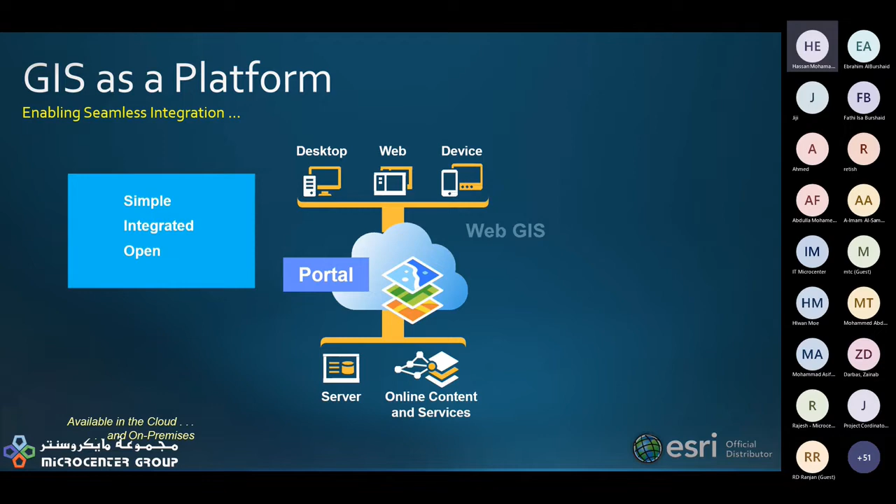This integration with the web has made people who were working in silos before, individually doing their own work, share their work with each other, and allowed organizations to work as an integrated unit rather than as individual silos.

Now, GIS also encompasses all kinds of data. In addition to the enterprise data, maps, and imagery, we now have content coming from a lot of sensors through various devices, and that enables us to have IoT analytics on our GIS. We can use big data, and we can even integrate social media content and do analytics on that, and many things that will become clearer when our speakers talk later on.

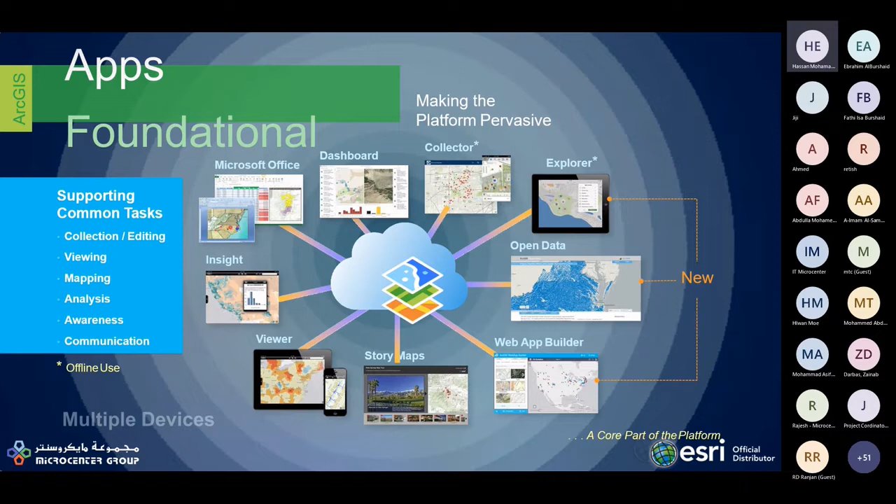ArcGIS also has many applications, and this is increasing every month as we go on. Things like Dashboard, Collector for field data collection, Explorer, Story Maps, Builders, Viewers, and so on are all becoming an integrated part of the apps that you can use, and you can have controlled access to these apps based on need, accessing the whole environment which is available.

Now, back to GIS Day. The previous year's focus was GIS in the time of COVID. What we did here in Bahrain was set up a portal with the Ministry of Foreign Affairs, and it was also linked to the global portal, which was hosted by Esri.

This year, our focus will be basically on three things: real-time visualization and analytics; BIM, which is building information modeling, integrated with our GIS, which is geographic information systems; and the third focus will be on spatial data science.

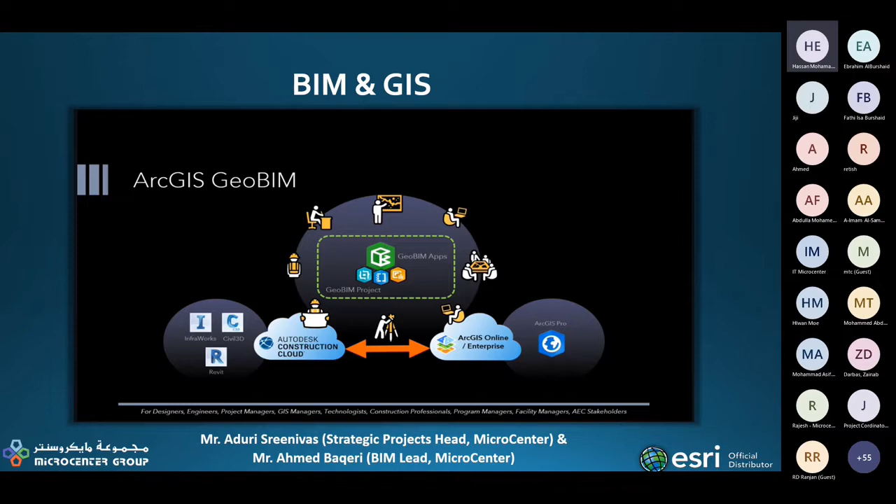Our third topic will be spatial data science, hosted by our engineer Ebrahim Alburshaid from the NSSA, the National Space Science Agency, who has been diligently working with Esri technology to develop analytics like feature identification from satellite imageries, aerial photos, things like vegetation, palm trees, and so on. He will enrich us with his knowledge in this field.

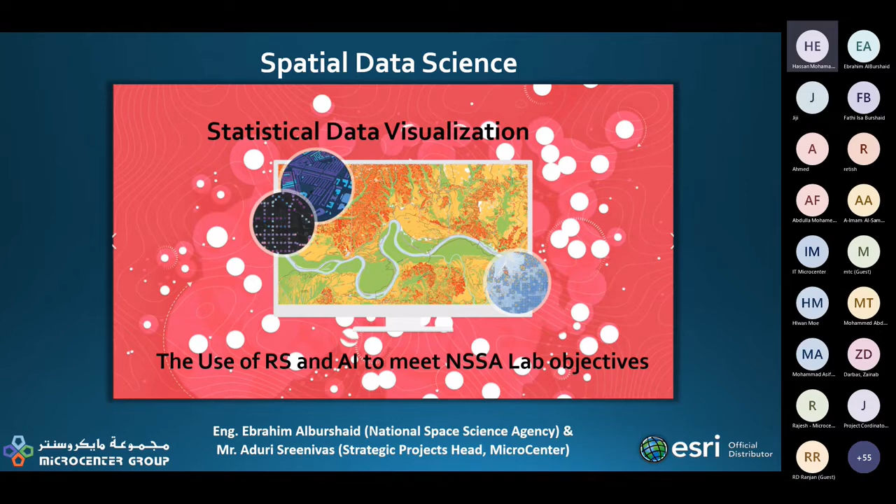Before I close, I would like to mention something about the organization, Micro Center, which we established in 1983-84. We have several divisions now. The Micro Center core division is Business Solutions and GIS Solutions. We have Micro Promo, then Micro Center Engineering and Special Projects Division, Micro Training Center, and QST.

On the very right side is our branch in Saudi Arabia, doing all of these things in the Kingdom of Saudi Arabia. Now, Micro Center group, I'll focus only on Micro Center Engineering and Special Projects Division here. We started this in 2010 or 2011, and we have moved into high-end precision surveys as inputs to our GIS system.

We use our precision RTK GPS, GPRs, ground penetrating radar for detection of utilities underground, and cable tracers. We also have LiDAR scanners, terrestrial laser scanners. We've now moved into vehicle-mounted LiDAR systems and very high resolution LiDAR technology.

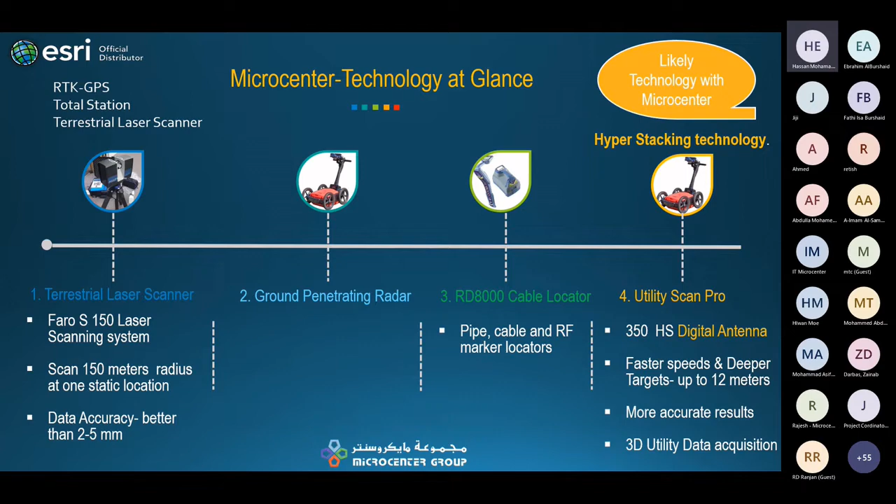With that, what we do is an integrated approach: LiDAR data acquisition followed by or with underground utility and soil profile acquisition. We can now move into mapping and 3D modeling and building information modeling, BIMs. All of this is now integrated with Esri ArcGIS Pro, as you will see with our next speakers.

The second thing to mention is about Micro Training Center, which is our training arm. It started out as an authorized Esri learning center, but now with the collaboration and integration between Esri technology and the AutoCAD world, spearheaded by Autodesk, we have also become an Autodesk authorized training center.

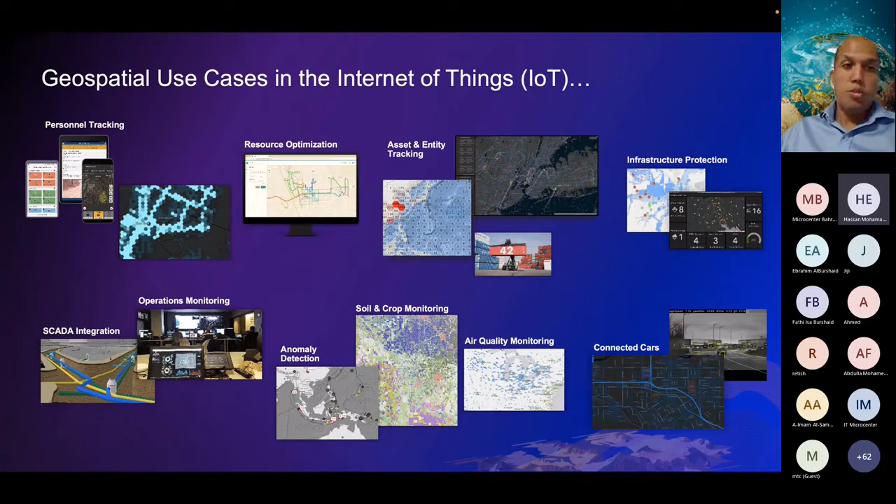So the key challenges in all those IoT sensors and in meeting those needs to make those use cases viable is mainly the ability to process high volume and velocity data to enable mission critical applications. In order to do this, we would like to first ingest all this data and analyze it.

Based on the analysis, find out what are the things that we would like to be alerted on, what are the things that we would like to take actions on. From there, this is where real-time visualization and analytics inside Esri came to the surface.

To integrate all the sensors, networks, and the Internet of Things platform that you have in place, whether it's fixed sensors or moving sensors, whether you have direct access to it, or whether it's a cloud IoT provider, you will be able to integrate and ingest feeds from all those sources or all those sensors, whether you would like to manage this infrastructure on premise, inside your organization,

or if you need our help in managing this infrastructure, making it scalable to support high velocity, huge data, we'll love to have this using ArcGIS Velocity. On premise, we provide you with ArcGIS GeoEvent Server and GeoAnalytics Server to have it in-house as you want.

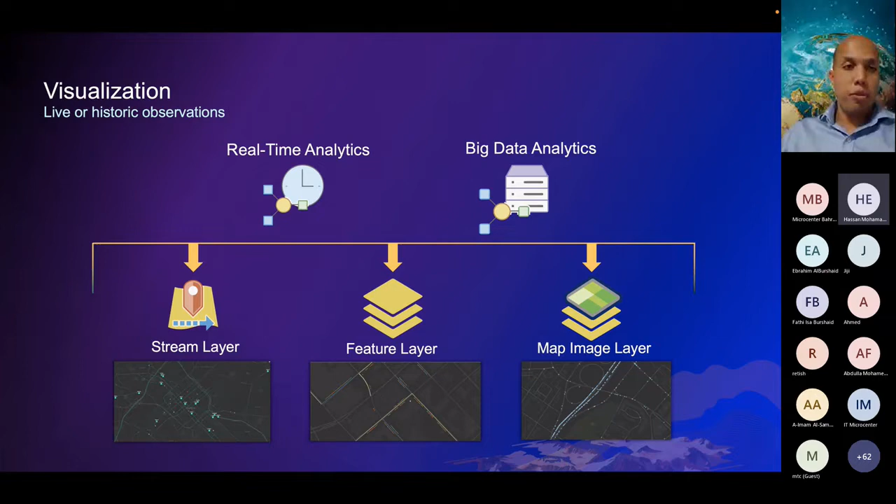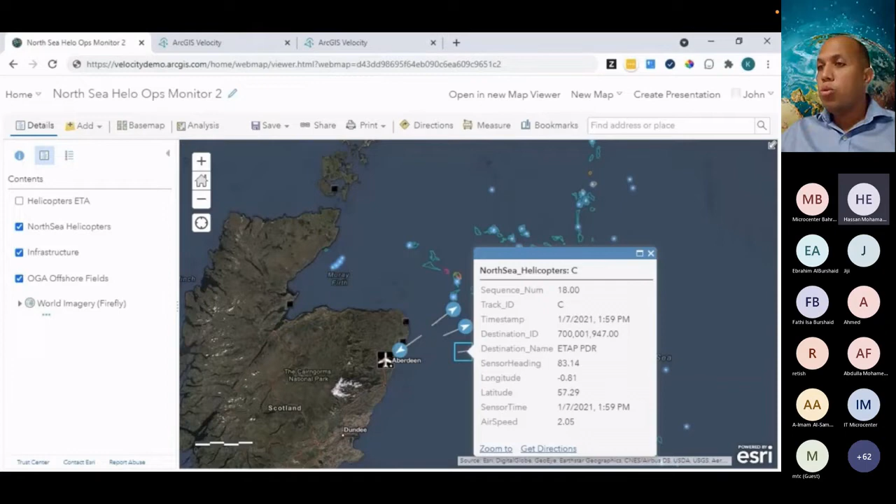Here we'll be able to get information about each helicopter, the timestamp, and various readings about the destination and where it's coming from. So the idea is, how can we configure such a thing, or benefit from such information? ArcGIS Velocity, with its three fundamental components—feeds, real-time analytics, and big data analytics—lets you go to the feeds and pick how you'd like to ingest the data.

Whether it's on ArcGIS or on the cloud, like the case we have, or web and messaging, or various data providers like Verizon or Geotab—there are a lot of options here based on the feeds and the IoT platform you're integrated with. So in this case, we'll take web and messaging.

As you can see, there are various ways for integration. We decided for this one to take an HTTP connection, and there's mainly no authentication type, so also keep an eye on whether it's a secured infrastructure.

For the schema, we also have auto discovery capability that allows ArcGIS Velocity to pull a sample of the data to understand exactly the schema. By discovering the schema, it provides us with what data is coming, what fields are coming, the field types, names, and various samples of the range and values. We can change the field types as we want, or ignore any fields we're not interested in.

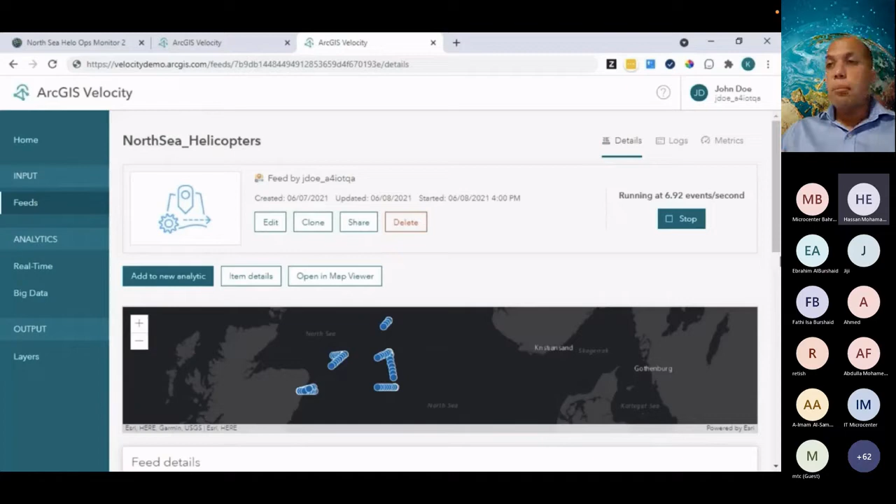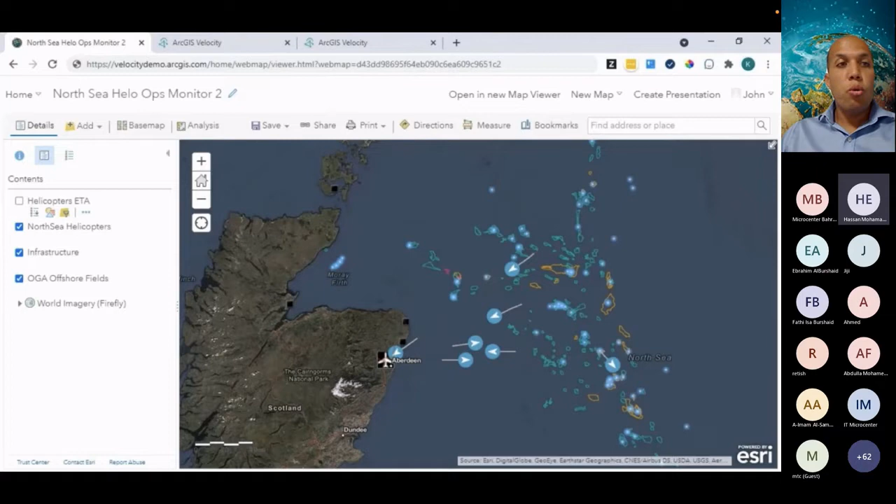The feed name—just define the name, and now we have this feed. We can see all the details here, showing the various configurations for this feed. By just having this, now we have a live stream, as we can see on this map, showing information of all the helicopters as they're moving, in a simple web map that we can use across the ArcGIS platform, whether it's in mobile devices, other web pages, or desktop applications with the various capabilities of the API.

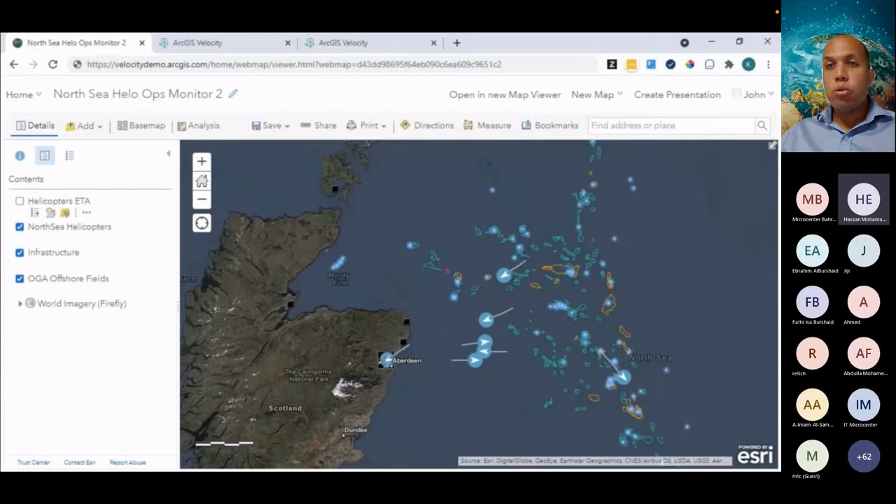Moving forward to the next element, which is real-time analytics, mainly for processing and analyzing the real-time data streams, which is the feeds.

So the flow here is we provide you with a way for configuring the pipeline of the analytics that you would like to apply to all the feeds as it comes. And the outcome would be either a feature layer for visualization or further monitoring, or it would be a notification, or an activation of other systems to take action as needed.

So the real-time analytics process and analyze those real-time data streams by having a definition of the input sources, which would be the feeds we mentioned, or it would be static data sources that we can add. Like, for example, in the previous example, the airport, because it's a static data source. We can define those as an input for those real-time analytics.

Those feeds, the sources of them would be coming also from various sources, as we mentioned. It would be from Amazon, from Azure, or even a public website with polling technology.

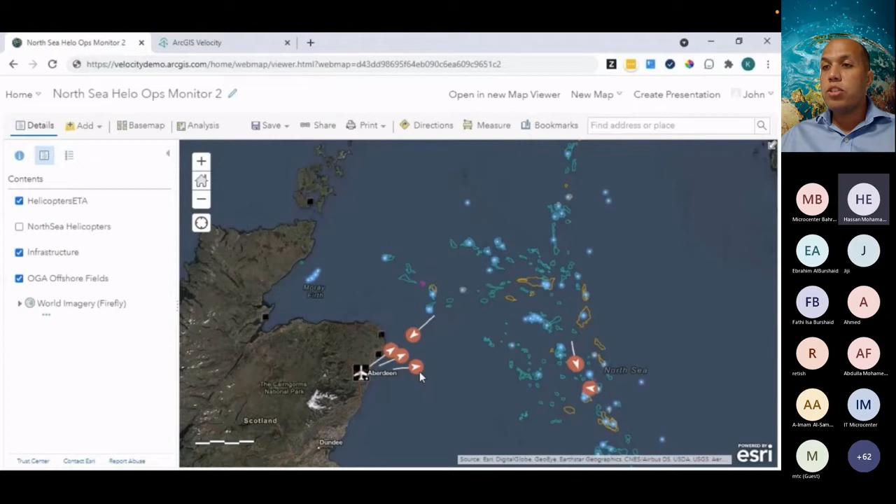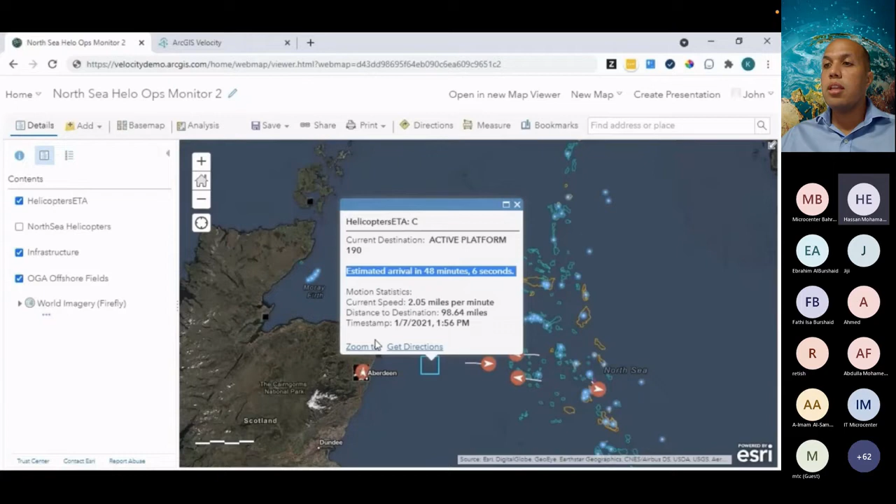The red ones here are the ones that we have just enriched with the estimated time of arrival. By just clicking on any one of them, now we have more insightful information. We know the destination, we know the estimated arrival time is in 48 minutes, and we also have motion statistics about the current speed, the distance to destination, and the timestamp.

This is how you would be able to leverage ArcGIS Velocity by defining this pipeline of analysis tools based on the real-time feeds. This is not limited only to simple analytics. We can also apply geofences to understand the distances. Let's see another example for applying dynamic geofences here.

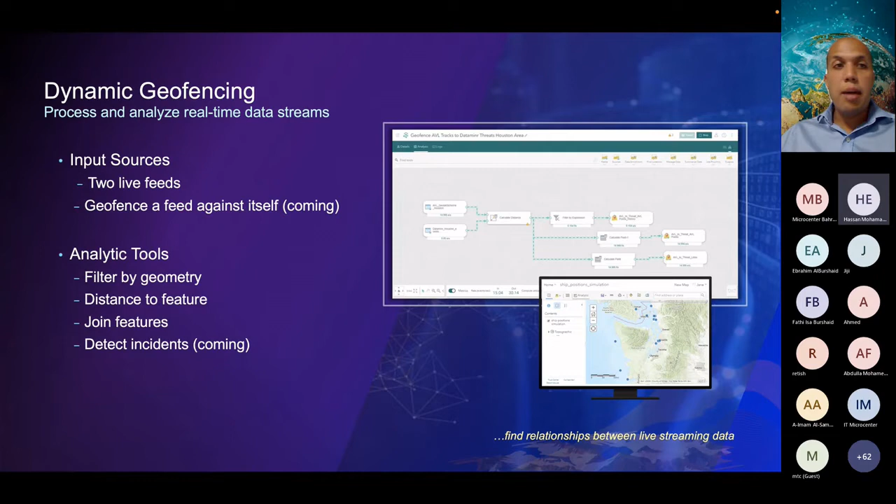Rather than talking about the flights or helicopters, let's go to the land here. In the land here, we have this AVL tracking system with all the AVL tracks as we are seeing, which we just defined its feeds to have all the information about the vehicle. Zooming in, we will be able to see them moving live, and this is in the area of Houston. So we would like to understand, are there any hazards on them or any threats on them?

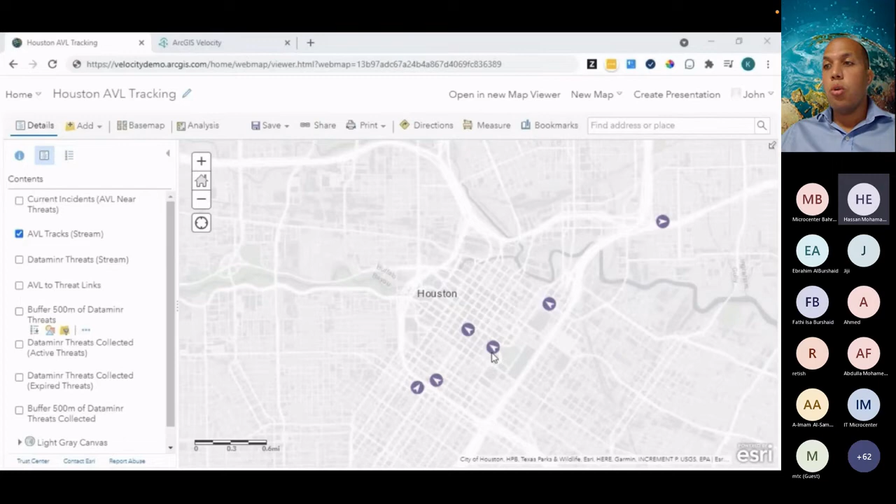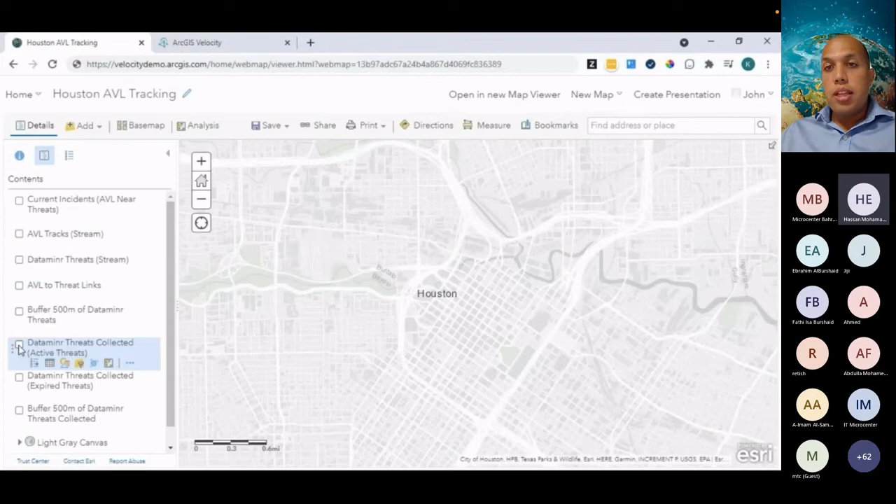We can leverage this by also integrating another feed coming from another partner of Esri called Dataminr, which provides threats actually across the world, whether it's political threats or major threats or disasters happening around the world. Let's see here that those dots in yellow are the Dataminr feeds, which is a representation of those threats. We would like to understand if any of our fleet is getting in proximity to those threats.

In order to accomplish this, we would like to build a buffer around each one of them, and then later we'll be able to have defined an expiry of the threats. The ones here, as we are seeing in gray, are outdated threats. So we need to ignore them and just understand if there are any risks or hazards on our fleet, because those are outdated already.

So we'll be able to filter this and define all this to identify which vehicles we need to keep an eye on, and maybe provide some messages and emails to those drivers to understand the critical situations they are in. We start doing this by going to ArcGIS Velocity and defining all those steps one by one. Let's go there and see it in place.

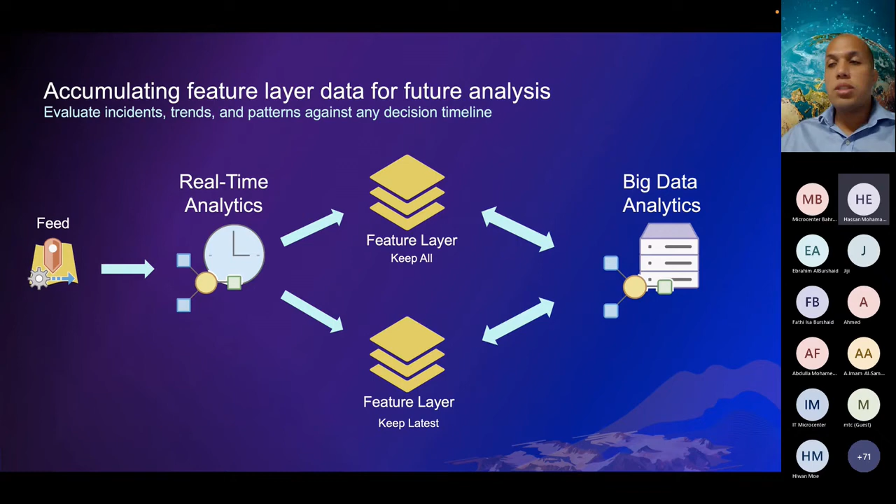So this is an example of how to apply real-time analytics using ArcGIS Velocity. But the next part is not only about real-time analytics, but also about the ability to create the same analytic pipelines on historical data. This historical data will be massive, billions of records. ArcGIS Velocity allows, in addition to real-time analytics, storing all historical records in feature layers, and using big data analytics with the same approach to create pipelines like the ones we're seeing here.

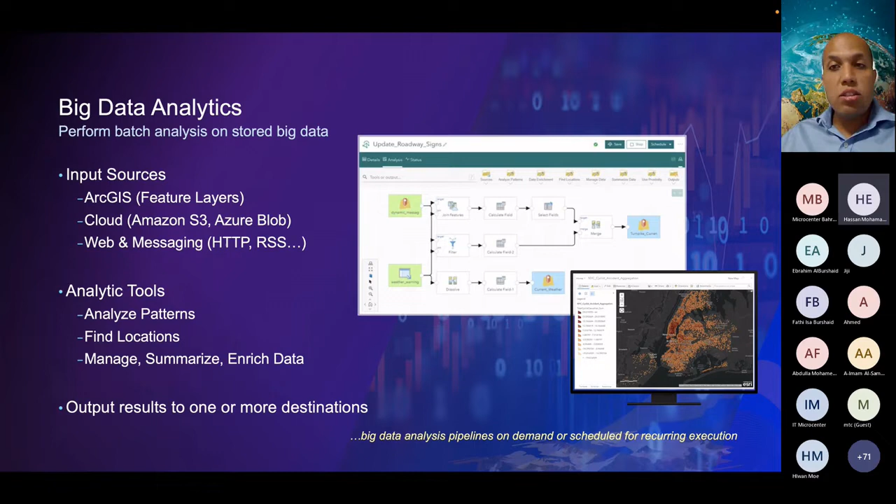You'll also be able to define the inputs, which in this case will be either feature layers or S3 buckets on Amazon or Azure blobs. This is for historical data places with massive big data, and you'll be able to ingest it not as real time, but for analytics purposes, to apply analysis patterns, find locations, and summarize the data.

You can run big data analytics only once, which would be great, but in some cases you may also need to run them periodically, maybe every few minutes to summarize the data because there is massive data coming, or every hour, or overnight, or maybe it's recurring every day. So you'll also be able to define the frequency of updates.

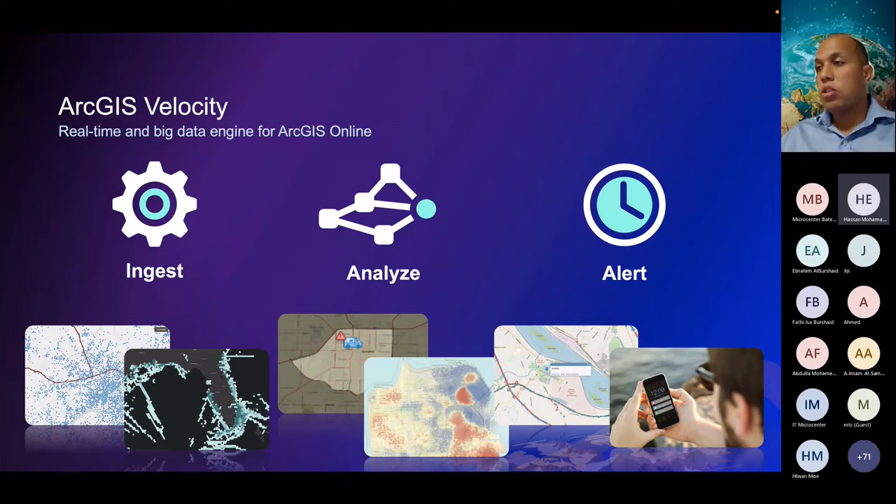To wrap up, this is how ArcGIS Velocity works as a real-time and big data engine on ArcGIS Online, ingesting real-time feeds, analyzing them in real time or in historical records, and providing alerts and messaging. This enables various capabilities including ingestion, visualization, applying geofences, detecting incidents, understanding trends of big data, and providing alerts as messages, emails, and various other ways for actuation of other systems in place.

ArcGIS Velocity is a SaaS offering. It's cloud-based, already configurable for user experience and guided, so no development is required. And it's managed by Esri, so it's scalable and will eliminate the IT staff configuration and maintenance needed for the infrastructure.

But at the same time, we also have real-time visualization and analytics available on-premise through the ArcGIS GeoEvent Server and the GeoAnalytics Server on ArcGIS Enterprise. This is for on-premise users and savvy IT staff who would like to manage everything themselves, or if you have a closed environment you'd like to extend with these capabilities, or if you'd like to do extra development into the intercommunication of those real-time feeds.

With that said, thank you for listening and being here with me, and I hope you have an enjoyable event. Thank you.

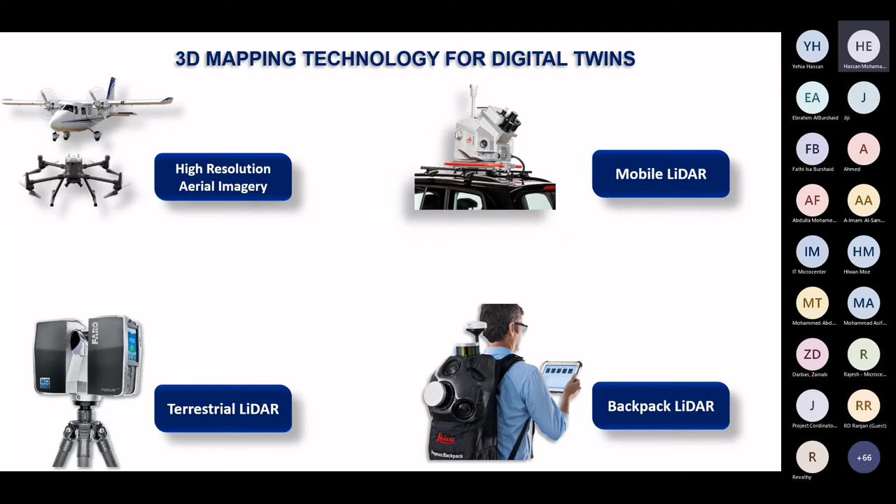And for indoor and outdoor, we can collect 3D point cloud data through terrestrial LiDAR, such as laser scanning. The evolution of mapping starts with 2D maps, going to panoramic image collection, and further developing reality models. Finally, we can build digital twins, meaning the virtual representation of a building.

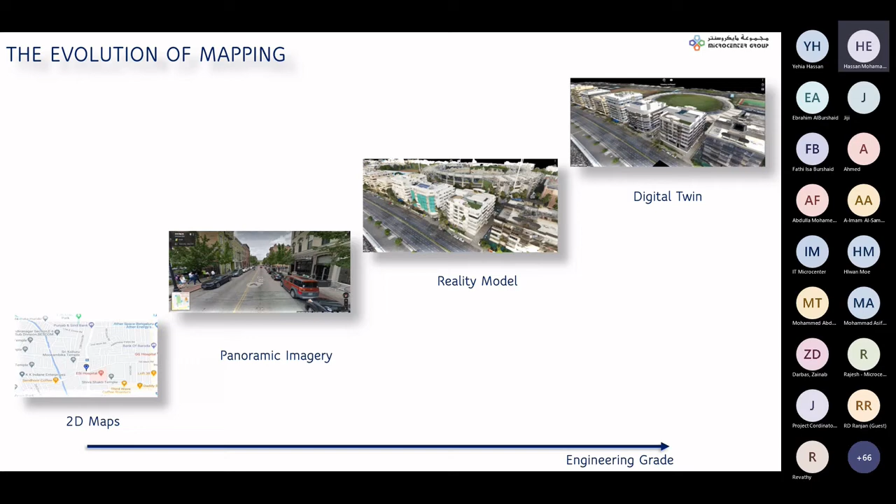Now, after collecting the point cloud data from either mobile mapping or terrestrial LiDAR and processing it, we can generate a BIM model with the help of point cloud. Now, what is a point cloud? Point cloud is basically a 3D representation of a physical object, whatever the 3D scanner captured.

The below shows a point cloud of a scanned indoor building, and we can see on the left picture a Revit model generated from the point cloud, where all features are designed as the actual model.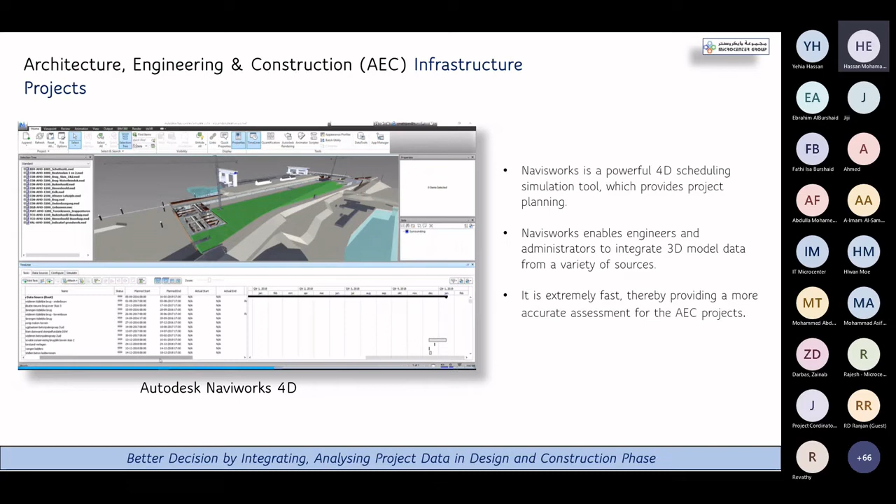When it comes to integrating BIM and GIS, designers, engineers, and project managers can utilize Revit, Navisworks 4D, and Civil 3D software. Using these technologies, we can go through Autodesk Cloud Platform and BIM 360. We can take all the inputs and transform from Autodesk Cloud Platform to ArcGIS Online Cloud Platform as an integrated component of a BIM and GIS solution.

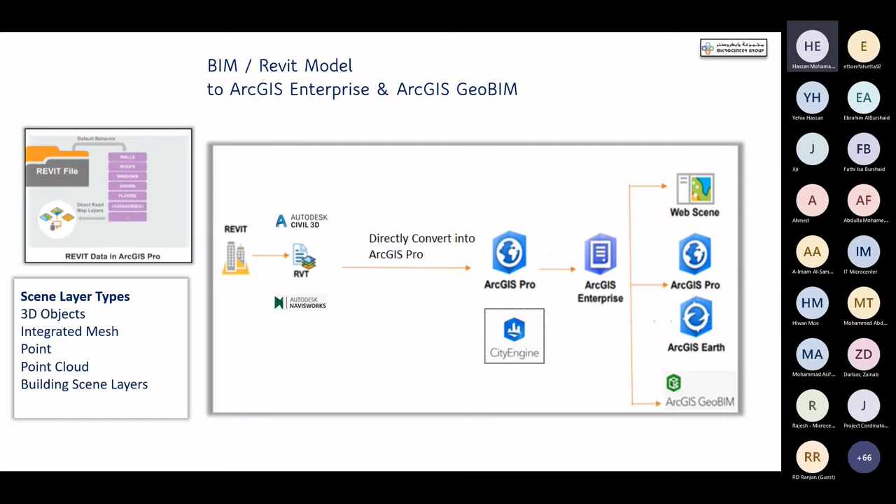So finally it will become a scene layer as a web scene. You can push it on top of ArcGIS Online as well as even ArcGIS GeoBIM - that we'll discuss in my next slides.

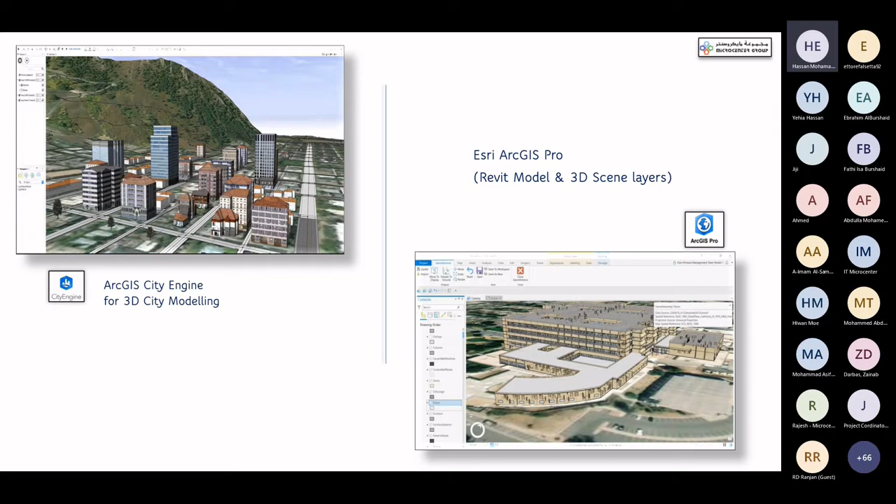So as I explained in my previous slides, CityEngine is 3D city modeling and ArcGIS Pro is a Revit model with 3D scene layers. There are screens that have been shown here.

Now coming to the next slide, we developed for one of my clients both 2D and 3D, okay? I'm not talking much about this project we developed for Bapco here, the local customer. But this is interesting since we're talking about BIM and GIS.

So I'd like to bring to your information, apart from the 2D advanced technologies, we also built 3D visualization analysis for subsurface facilities, cut fill analysis, elevation profiling, slope analysis, and exclusively even viewing well trajectories on a 3D map, because this is very important for the oil and gas sector.

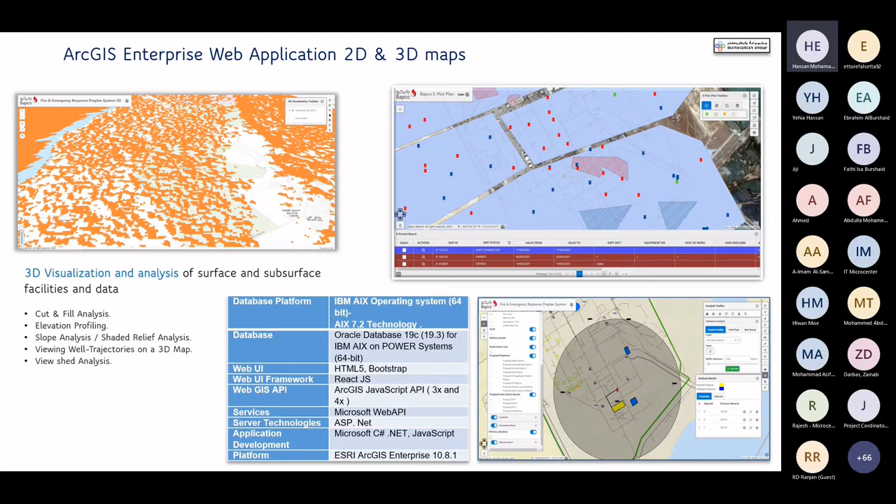So viewshed analysis also. Now if you look at the database platform, it's developed on top of ArcGIS JavaScript API 3x as well as 4x, because JavaScript 4x supports more 3D development, 3D visualization, and can enhance the functionalities.

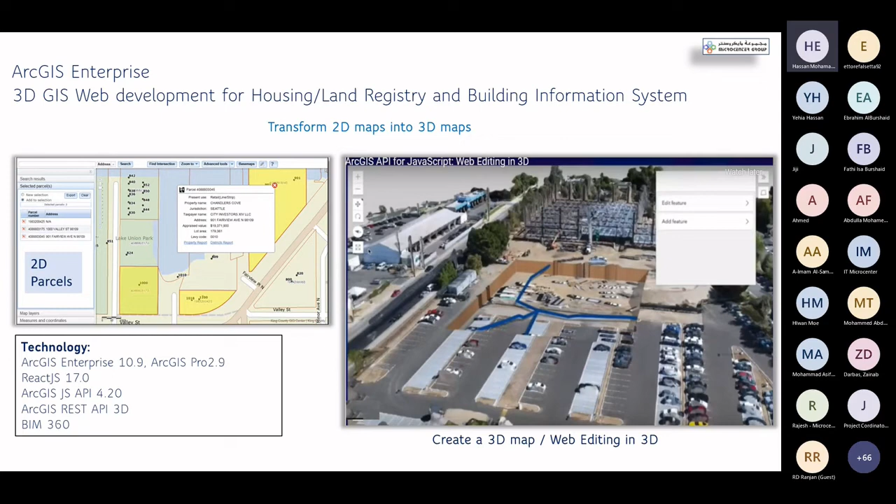The technology I've mentioned here, like ArcGIS Enterprise 10.9, was released just a couple of days before. We can develop with React.js and even ArcGIS API platforms. But the BIM 360 Revit model is very important, a primary requirement from the beginning to transform from 2D to 3D. So that's what we tried to show on the previous screens, transferring your 2D maps to 3D maps.

Now this is another 3D ESRI GIS web development for viewing, analyzing and BIM models. We can also make some sort of query and analyze that. Even 3D model analysis we can develop. So here I would like to show you a video for a few minutes.

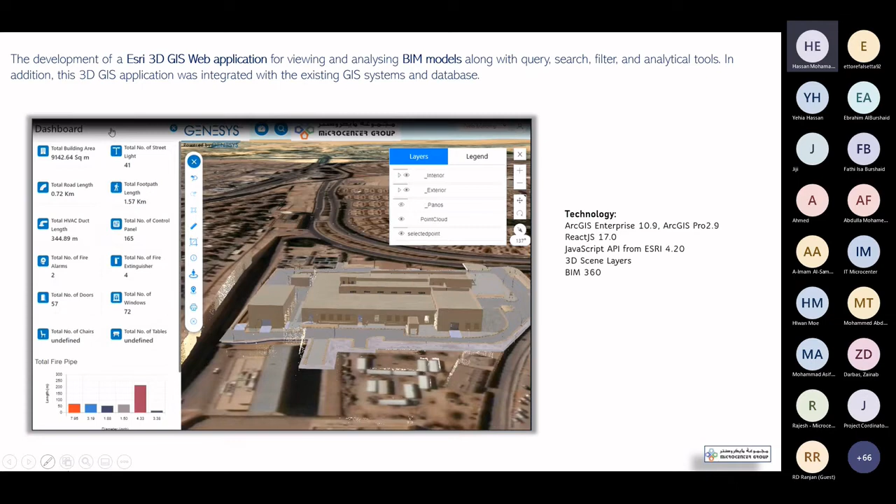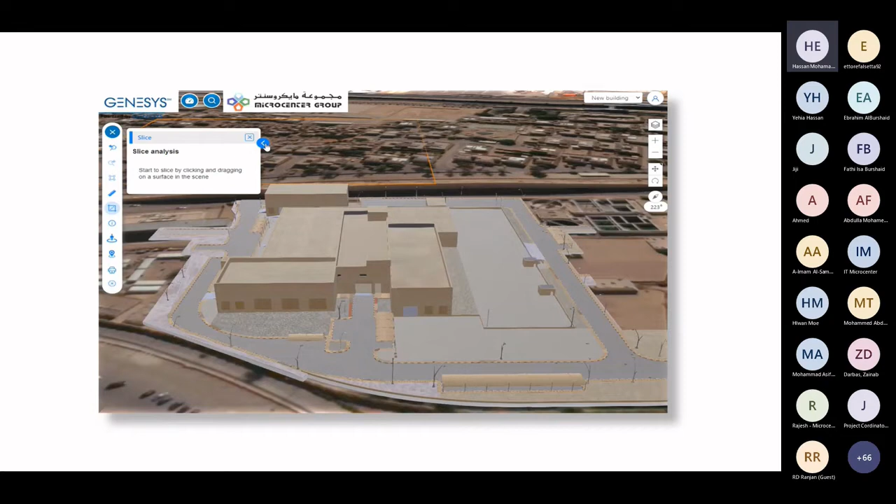This is one of the universities in Saudi Arabia we developed. If you look at this screen, it's been built on top of ArcGIS server. We did a 3D survey and created BIM Revit models, and you can see it going through slicing now. Slicing means you can see inside the objects and even external and outside as well. So this is the kind of slice analysis.

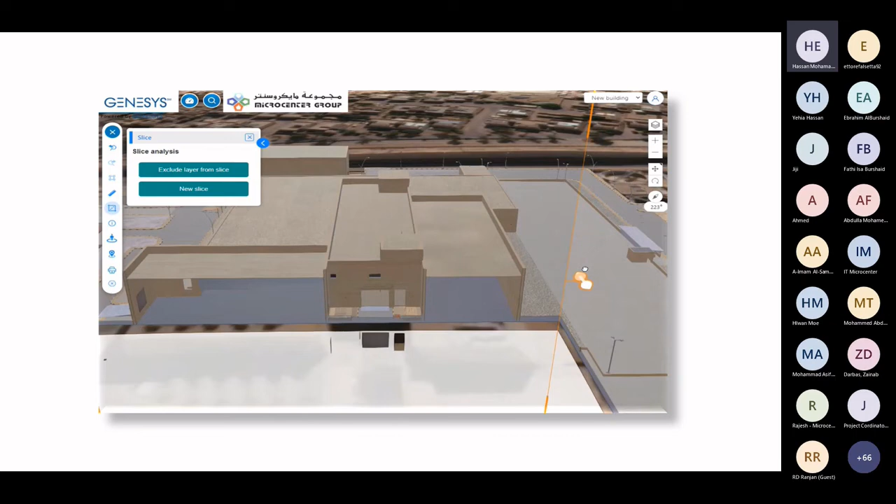With slice analysis, at a time you can view inside the door and even outside the door as well. You can visualize that because it's a BIM component, right? As a Revit model, we can view the inside of the building or outside at a time, parallelly.

Now here, this is a 3D scene layer as I explained in my previous slides. You can also measure the distance, calculate the area, and even the geometry, the area and dimensions.

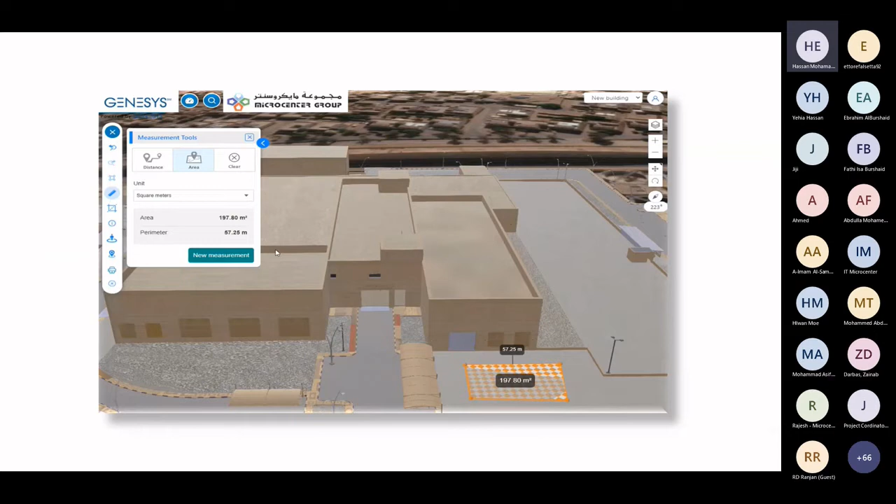The second thing is you can also have buffer kind of tools, and also have a print option. And if you can see the layers here, this is an interior, and even exterior, panos and point cloud data.

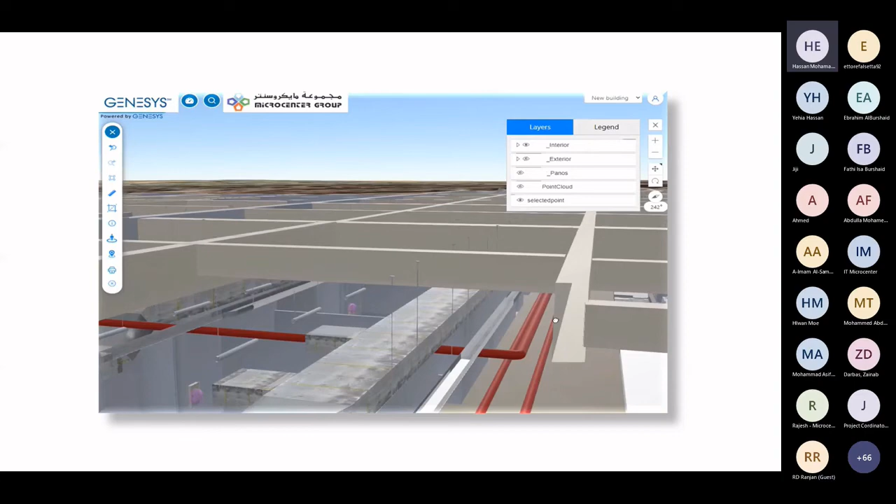Now here we are trying to show this is HVAC, meaning heating, ventilation, and air conditioning. This is an indoor mapping. So you can view indoor as well as outdoor, for example measure the distance.

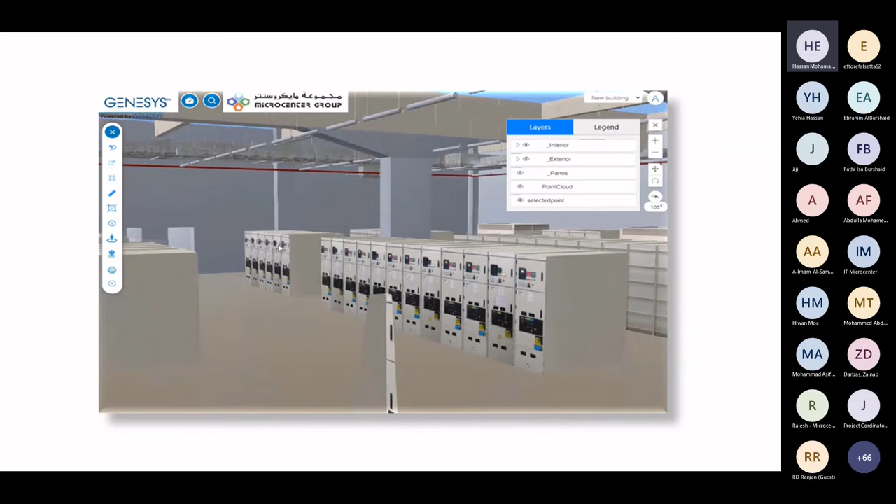This is HVAC - heating, ventilation and air conditioning - as a technology for indoor and vehicular environmental comfort. This is also something we can develop as part of BIM models. So point cloud data is being added on top of it.

We are working with our technological partner Genesys here.

So that's the dashboard analysis. As I said, it's built on top of ArcGIS server using 3D scene layers, also having web editing. You can create a complete dashboard analysis based on the client business requirements.

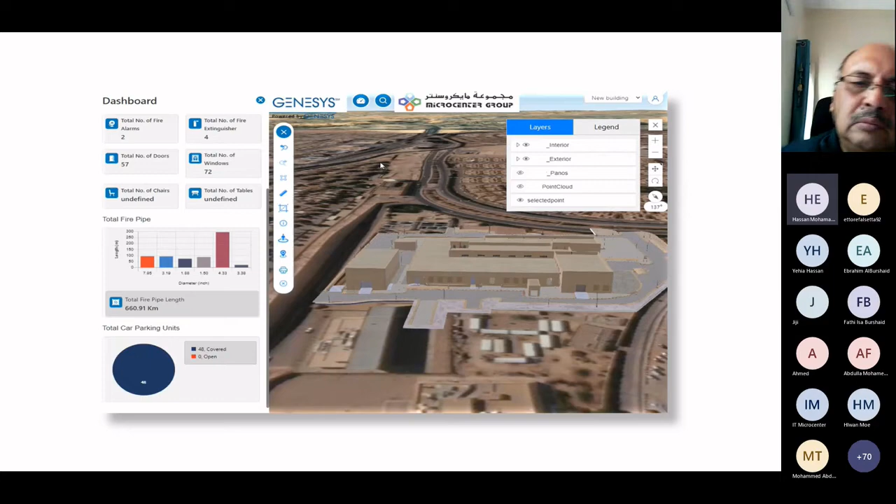ArcGIS Urban is an extension of the ArcGIS platform. This extension provides a web-based interface for accessing data, tools, and a designing environment for creating sophisticated maps and visualization. You can also understand population patterns and distributions, combining different data sources to enhance understanding of city performance in depth.

So this data has to come from the customers, and we can also develop the data model and data migration because the customers might have different kinds of databases, and that has to be taken into consideration. We need to enhance the data, and we can develop ArcGIS Urban models for the customers for city and urban planning, which itself enables smart urban planning and development.

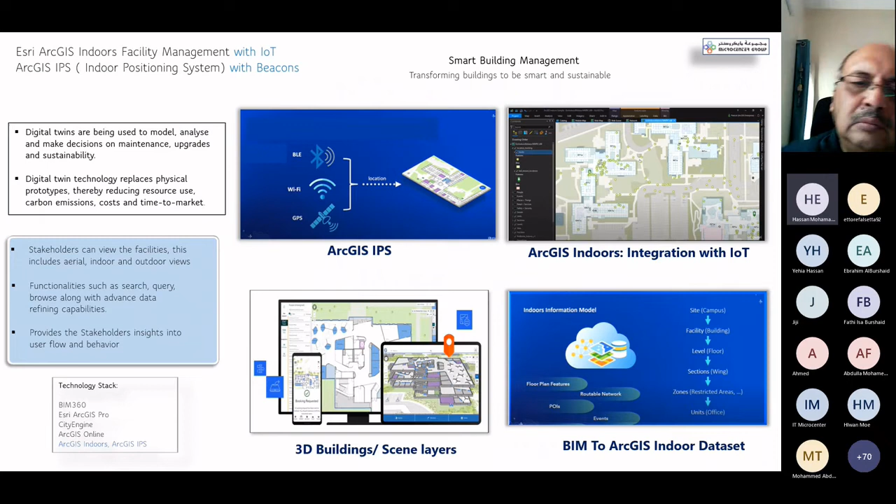Now I'm talking about ArcGIS GeoBIM. This ArcGIS GeoBIM is recently released from ESRI, it's a new product. ArcGIS GeoBIM is an extension to the geospatial technology of the ESRI ecosystem. It's a powerful software solution that helps you get the most out of your building information modeling, and ArcGIS GeoBIM can leverage the power of ArcGIS Pro, ArcGIS Enterprise and ArcGIS Online.

So ArcGIS GeoBIM allows you to analyze spatial data in the context of topographic maps and 3D building models, and visualize the models. What I'm trying to say is ArcGIS GeoBIM can be an innovative web experience to explore, and we can collaborate between the Autodesk Cloud Platform and the ArcGIS Online platform. This is an integrated component recently released from ESRI as ArcGIS GeoBIM.

Now, if you look at this ArcGIS GeoBIM, it enables the linking of projects and workflows by connecting the ArcGIS with Autodesk Construction Cloud. If you look at the left side screen, this is a building, and this is an ArcGIS GeoBIM environment. If you click on the scene object on the left side, on the right side you can view at a time the Revit model, with details like dimensions, object ID, category, element, and everything. The Revit model on the right side has been brought from Autodesk Cloud Platform, played on top of ArcGIS GeoBIM. So the AEC people can view at a time both geographical location and the Revit model on the same screen using the GeoBIM platform.

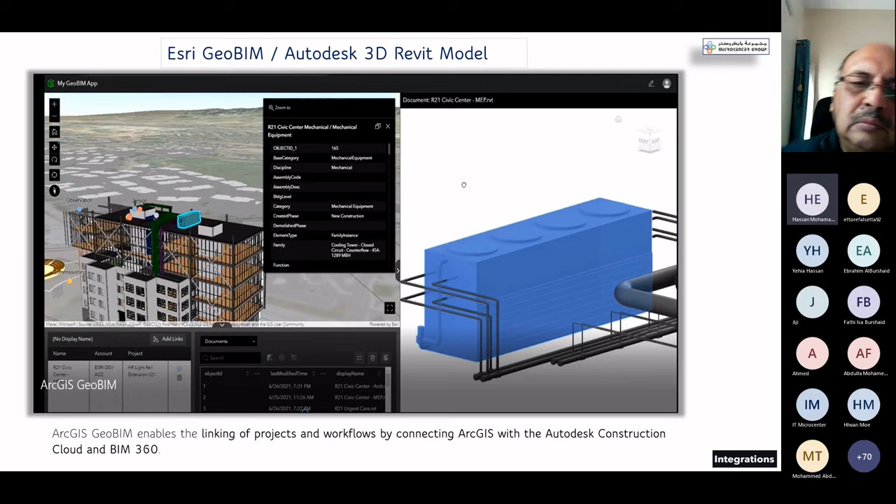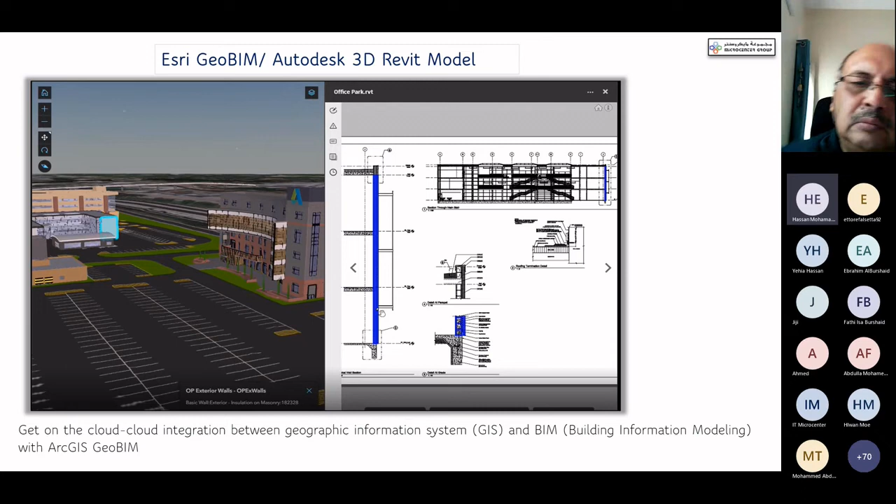Now this slide shows the cloud integration component between Autodesk Cloud Platform and ArcGIS GeoBIM. On the left side we have shown a building, and on the right side we can see the Revit drawings. For example, take this building: the right side is a Revit model, but architects or civil engineers give drawings to IT companies or someone else. So how will they compare it? What I'm trying to say is that Revit and DWG drawings can also align at the same time on the left side screen in the GeoBIM environment. It should exactly align, including the floor plan and total building measurements. Apart from the asset details, you can also view and align them along with the GeoBIM map, giving assurance that exactly what the architects specified in terms of dimensions can be seen on the left side screen as well.

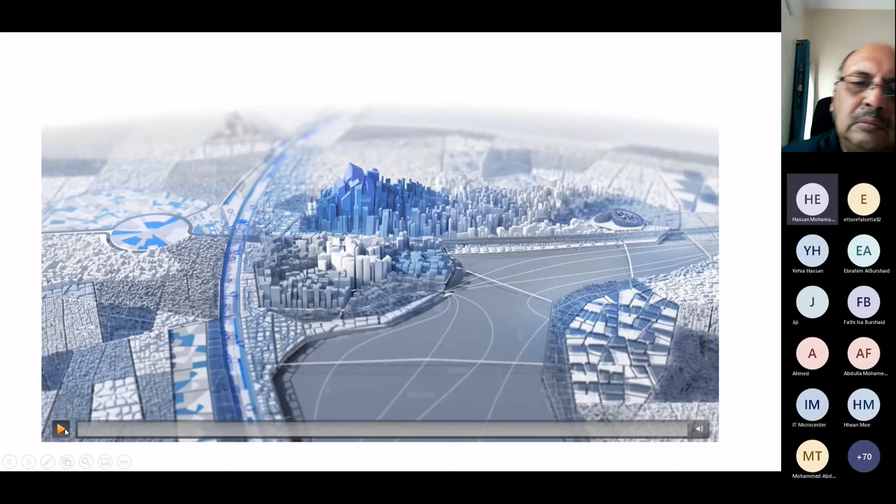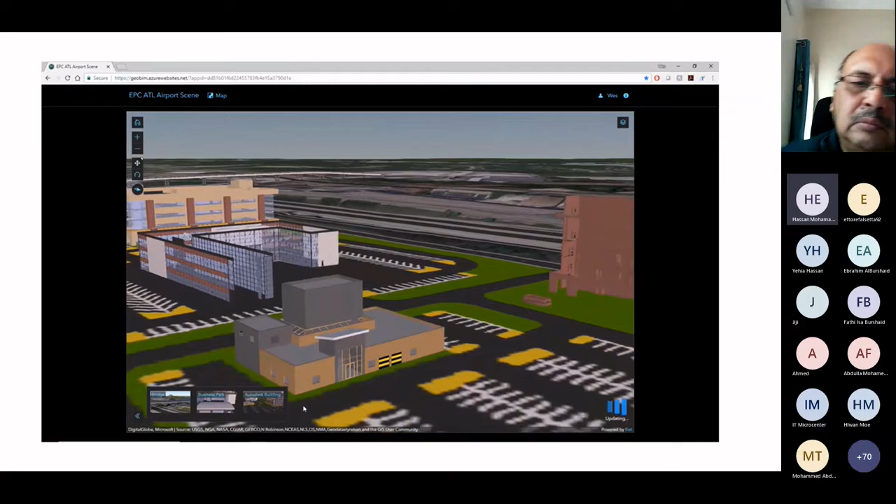Now here I would like to show a small video. Yeah, this is ArcGIS GeoBIM, as shown in the previous slides. Now again I would like to show this: this is BIM and GIS integration. As I said, this is an ArcGIS GeoBIM platform, and you can view the geographical locations, exactly the building or even different objects, as scene layer packages.

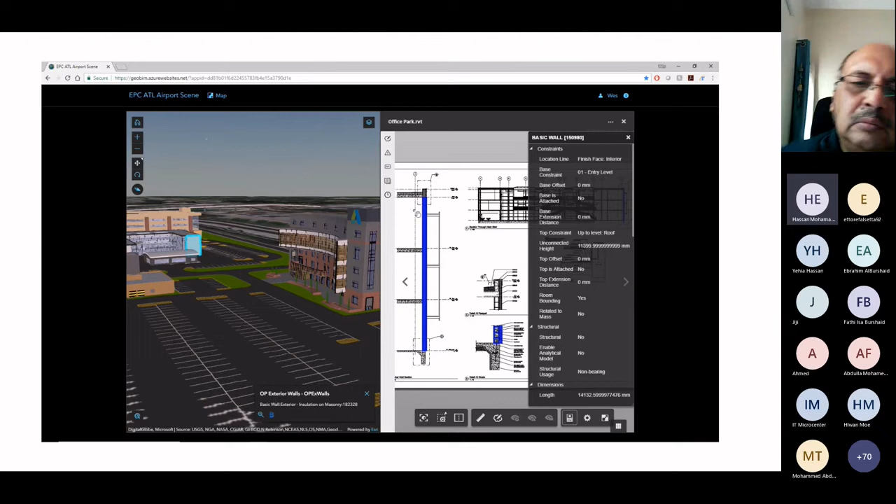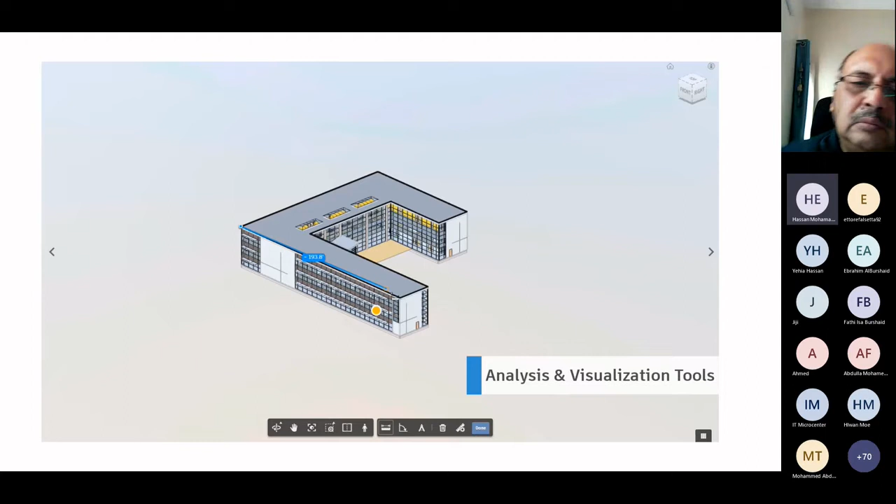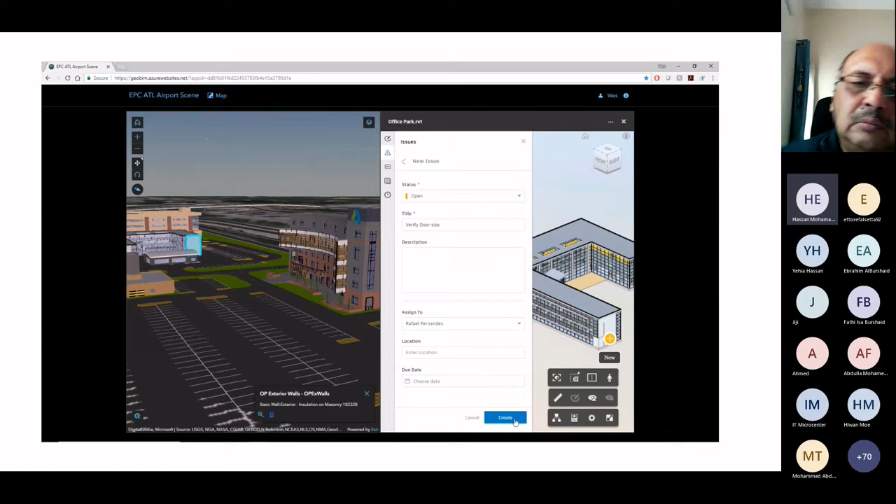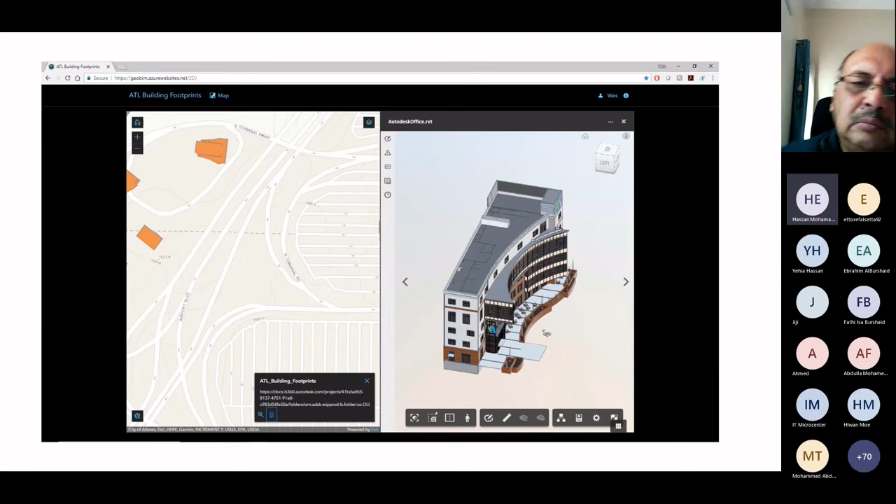If you click on that, you can see exactly the Revit model. Now how this happens: you need to put all your Revit models, Revit drawings, even Navisworks 4D, and documents, all kept ready in the Autodesk Cloud Platform in BIM 360. You need to push the entire Revit models and components from the BIM 360 platform, which is the Autodesk cloud platform, to ArcGIS Online, because ArcGIS GeoBIM resides on top of ArcGIS Online. That is why you can view on the left side the geographical location of the buildings, city planning, or urban planning, and at the same time see the architectural concern, because GeoBIM is more about AEC - architecture, engineering, construction. You can see the location of the building as well. So this is a combined package of both 2D and 3D for asset information, building location, and you are able to visualize information about AEC.

Now what is the advantage of going for this GeoBIM, GIS and BIM technology? This is more advantageous for AEC professionals, stakeholders for business decision making, customers, and even governments. Geospatial applications are very good for operations and maintenance activities. Finally, these are the applications we can build: for ArcGIS Urban, we can build BIM and GIS applications for urban planning, housing and building information, GIS facility management systems, architecture, utility mapping, IoT, 3D terrain mapping, and telecom and railway corridor mapping.

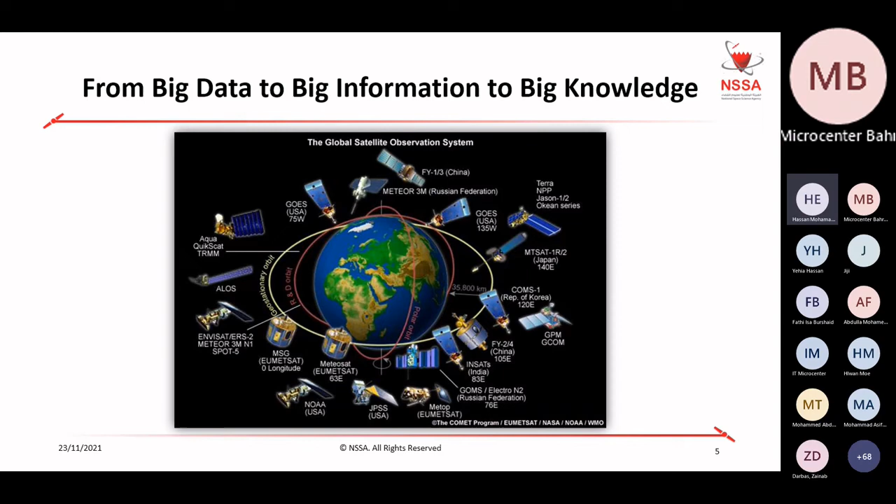I will start to give you a brief about EO data sets, to give you an insight or snapshot of remote sensing. There are a lot of EO data sets available, some open source and others commercial.

Starting from aerial camera, multispectral satellites, to radar satellites that have the ability to penetrate the cloud, and then the promising and newly developed sensor: hyperspectral. It gives you the ability to capture the full range of spectrum with very narrow bands, and you will have many bands in your data set.

All of these sensors have different applications. You need to select the sensor that fits your applications.

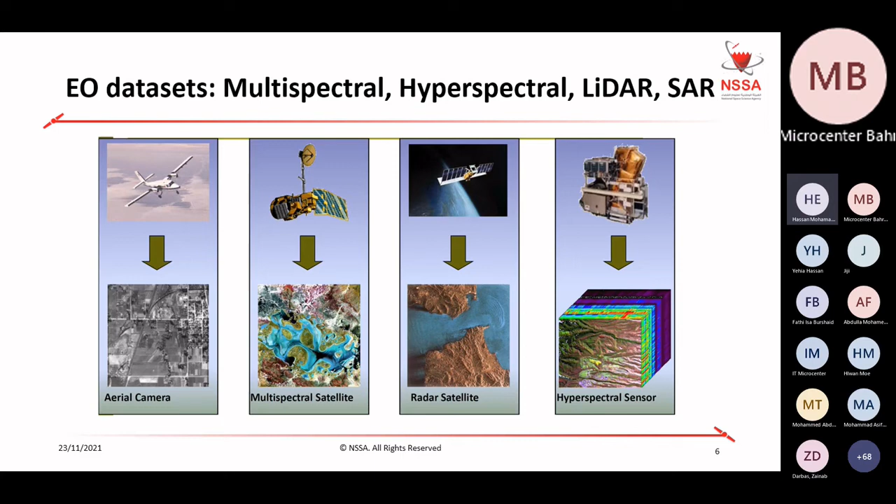I'll give you satellite imagery characteristics, and our aim in the lab is to transform this satellite imagery into an application that helps the citizen and fills the gap in information in the Kingdom of Bahrain. So what's the information that I can have? I'm answering every day, what's the information that I can have, generate, or extract from this satellite imagery that helps Bahrain citizens?

The characteristic of satellite imagery is covering a wide area. You can have a lot of frequency options, for example, one satellite provider company can capture Bahrain every day. So if your application requires you to monitor a location every day, you can do it easily by satellite imagery, and a lot of applications can be done through satellite imagery.

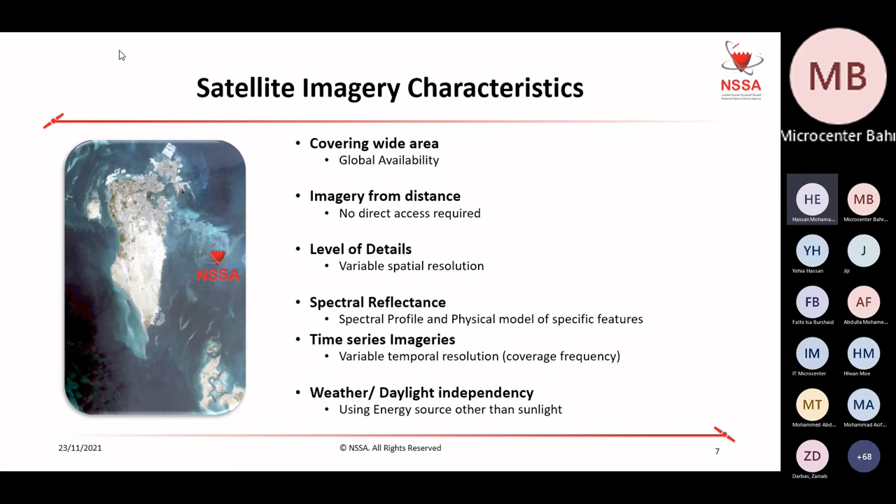There are other sensors that can provide other data, not satellite imagery, like data regarding X-ray, gamma, and for example for air quality they give you concentration of CO2 and similar things.

Due to the short time, from 2018 until now, I think three years, we did some applications in our lab, starting from surface temperature analysis to monitor agriculture in Bahrain, to object detection of palm trees, oil spill detection, ship detection, air quality, soil classification, and building change detection.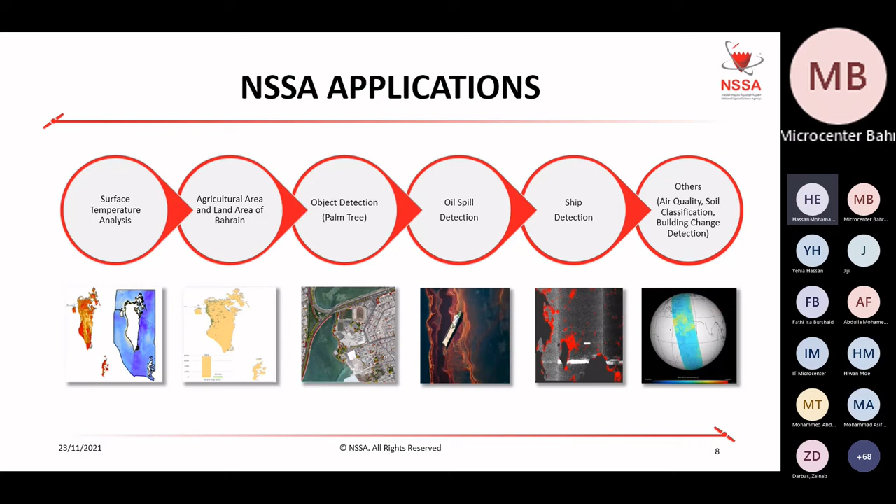We have the ability and we have a trained team that can deliver a lot of applications based on governmental requests, as you can see, and we did pilot projects in different domains of applications.

I will give you some historical data about classification, since it is one of the major applications in remote sensing. Traditionally, we used to classify satellite imagery based on pixels, so every pixel can only be classified as one object, either a building or roads or anything.

This is called hard classification. Then newly, there are others like soft classification, which uses fuzzy classification that can give you, in each pixel, classification based on multiple classes. This is a huge development in the field of classification.

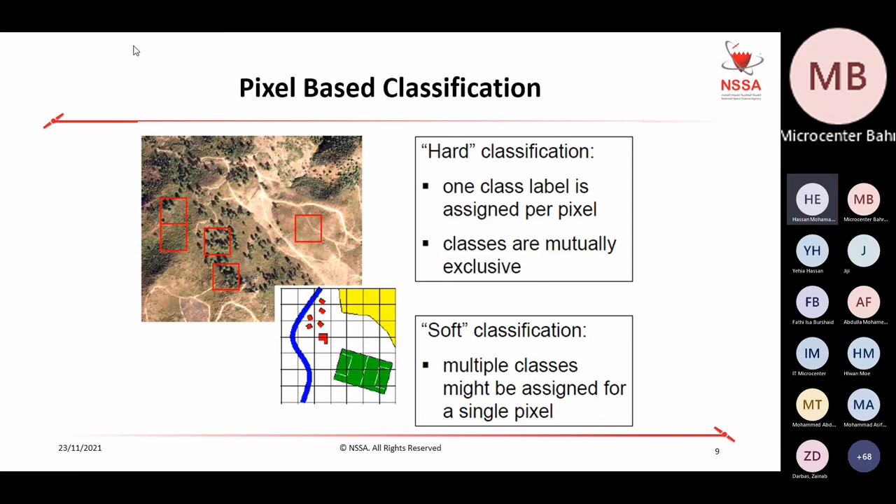The advantage for the analyst is to have a quick solution with the highest accuracy, so you can map, for example, Bahrain with just a few clicks, without the need for many employees. Imagine this is not only for Bahrain but any place you are interested in.

We did an image classification and prediction using the Northern Governorate as a sample. We transferred, as you can see on your left hand, from an image to a map consisting of 4 labels, and with these 4 labels we wanted to study the interaction between the urban area and the agriculture area.

We did classification for 3 years: 16, 18, and 20. Then based on AI models, we used to transfer or predict what will happen in 2030. As you can see on your right hand, there will be huge development, especially in the southern area of the Northern Governorate.

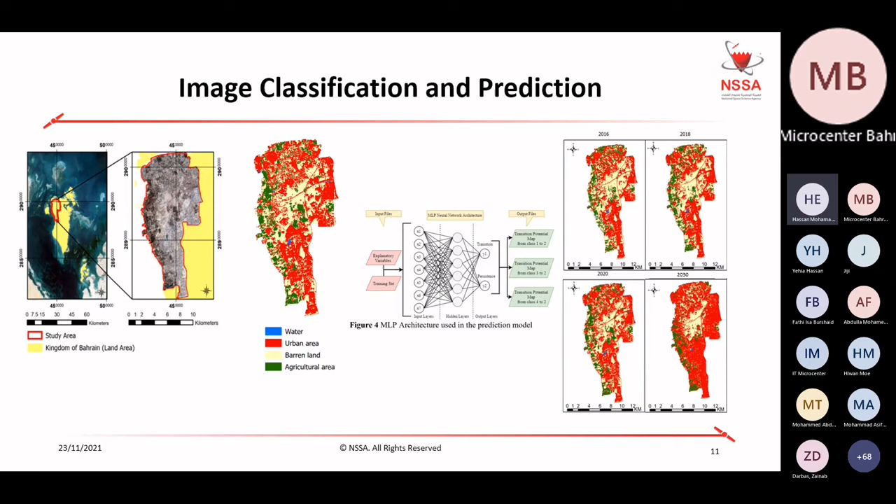Then I'll give you another example of object detection using deep learning. This area is a hot topic and trend in the remote sensing community, due to the very high spatial resolution now available in the market. It was 31 centimeters per pixel, but now there's more, maybe 25 centimeters, I think in Indian satellite imagery. Due to this achievement of capturing satellite imagery with very high resolution, there is a good opportunity for integrating deep learning to detect any object you are interested in.

By using deep learning, you train the machine to detect these types of objects, and once you detect the object, you need to delineate it, then categorize it through the GIS environment, and you will have very updated and recent data about the area you are interested in.

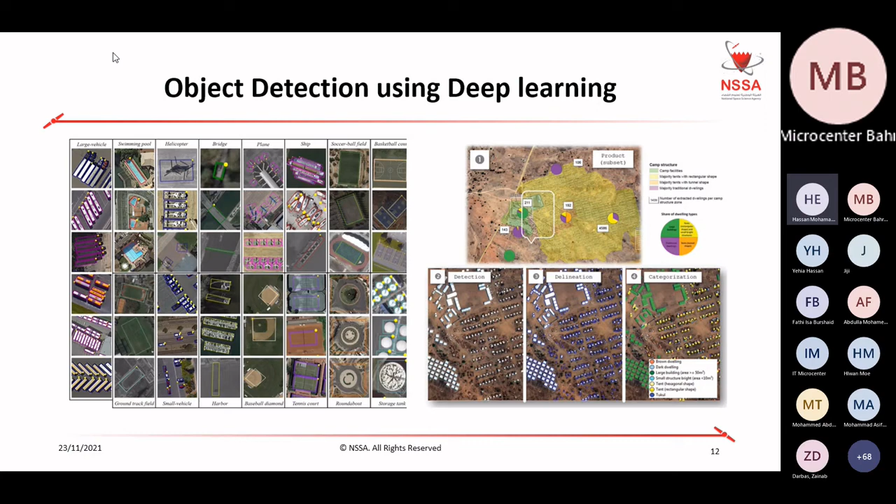We did something similar with the help of ArcGIS and deep learning using Python. We had a request from another government entity to know how many palm trees are in Bahrain. We checked this methodology and got a very good result. As you can see, we are able to detect all the palm trees in Bahrain using satellite imagery with the help of deep learning.

We also managed to assess every palm tree, as you can see on your right hand, using what they call a vegetation index. This is a very good application that can help farmers know about the health of their plants using geomatics applications.

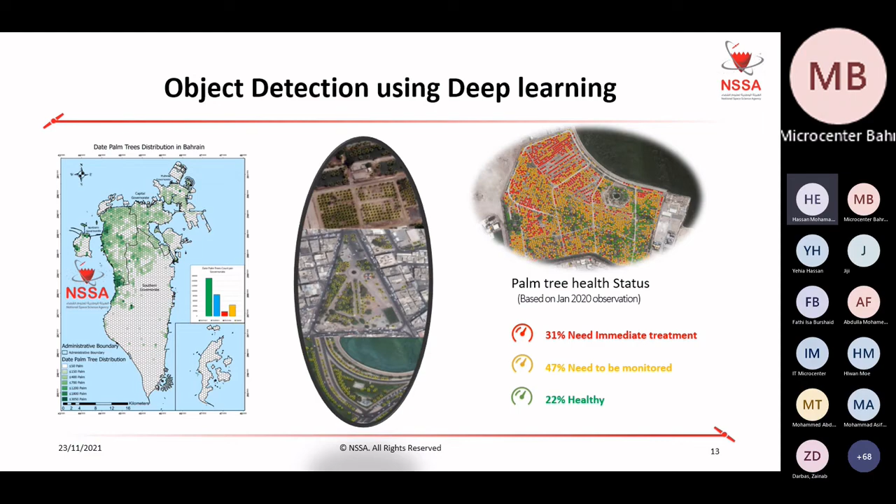Just a technical analysis of the geospatial solution regarding the added value of doing deep learning: if you do it manually, we estimated you will need 5 members for 4 months to do the manual recognition, while integrating AI, you will only need 2 members with 2 weeks to hours, who can detect everything and find a solution for your problem with the lowest resources.

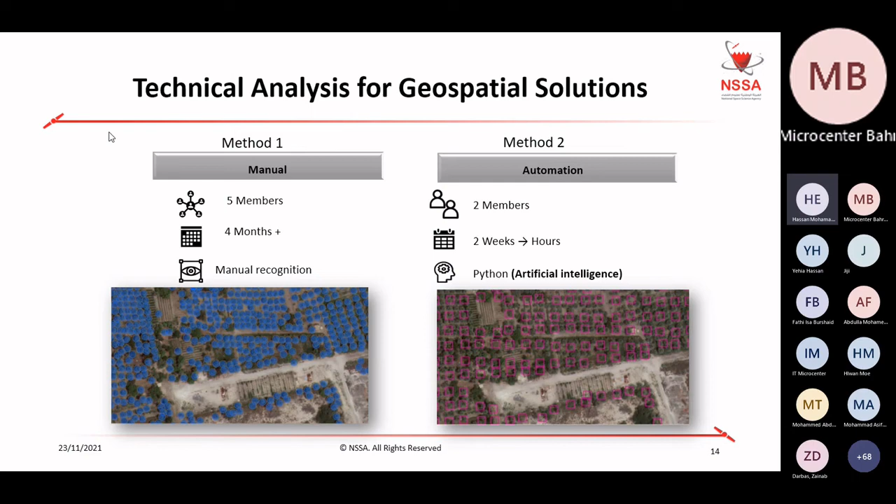We did also an economic analysis for our geospatial solution for project A, as I explained to you, and for project B, using the benefit cost ratio. We collect the amount that needs to be spent for each project and what's the benefit for each project, and we run this project for 10 years from 2020 to 2030, and we get a BC ratio, which is the benefit cost ratio: 1.23 for project A. What does this mean? This means that for every 1 BD you spend, you will get 1.23 BD as a return.

And you can see also for palm trees, instead of doing it manually or using GPS or any other method, this technology will give you, if you spend one BD on it, you will get almost double, which is 2.19 BD as a return for your investment.

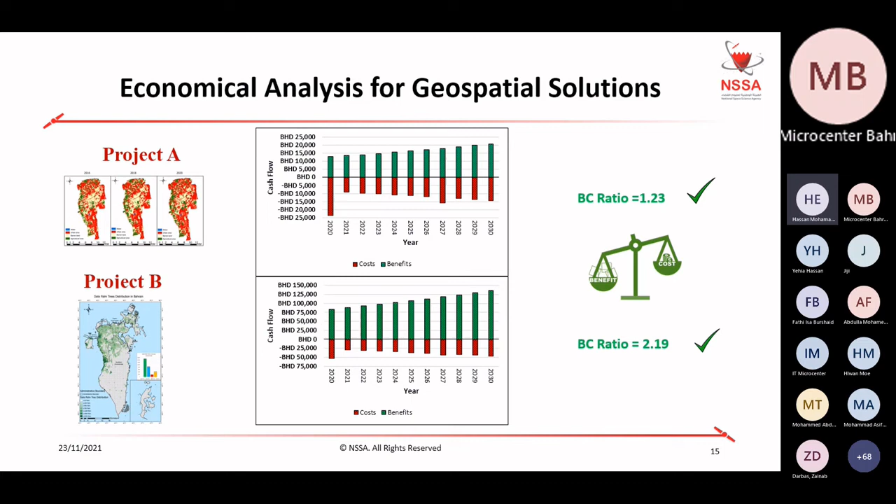This is, I think, the end of my presentation, and thank you for listening.

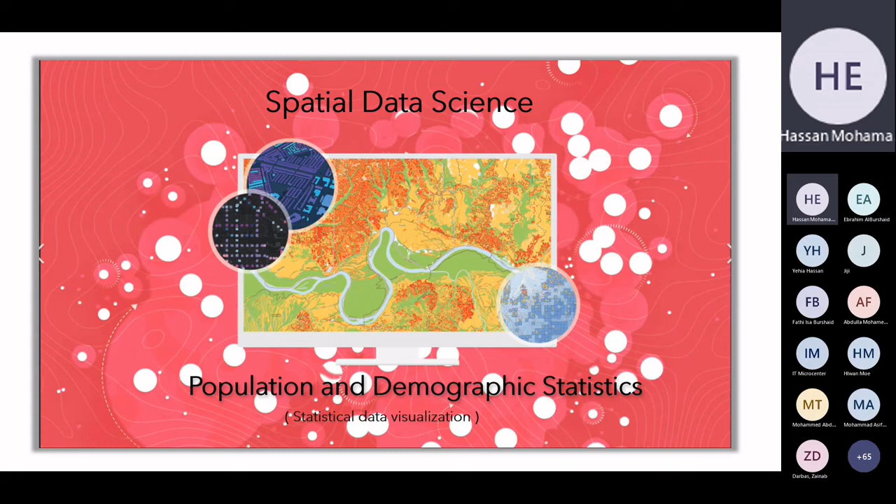Now we are talking about population and demographic statistics. Machine learning can be used to give high quality estimations of populations as well as the demographics those populations represent. In the past, census data was the main source of information for GIS analysis. Now there is a new generation of machine learning techniques that can process large quantities of data and find patterns in it. GIS analysts have access to more data points than ever before.

Machine learning and deep learning techniques have become a very important component for governments in terms of demand for data science services. They are really increasing, turning toward data-driven decision making, rather than using census data for demographic data analysis. Machine learning gives a larger impact for quick decision making.

Now I'm talking about data science for demographic and population analysis - what are the stages? There are 3 stages I've mentioned here: data preparation, analysis, and dissemination. Data science refers to the process of extracting knowledge and insights from data. This field includes several disciplines, including statistics, data analysis, information retrieval, pattern recognition, and NLP - natural language processing.

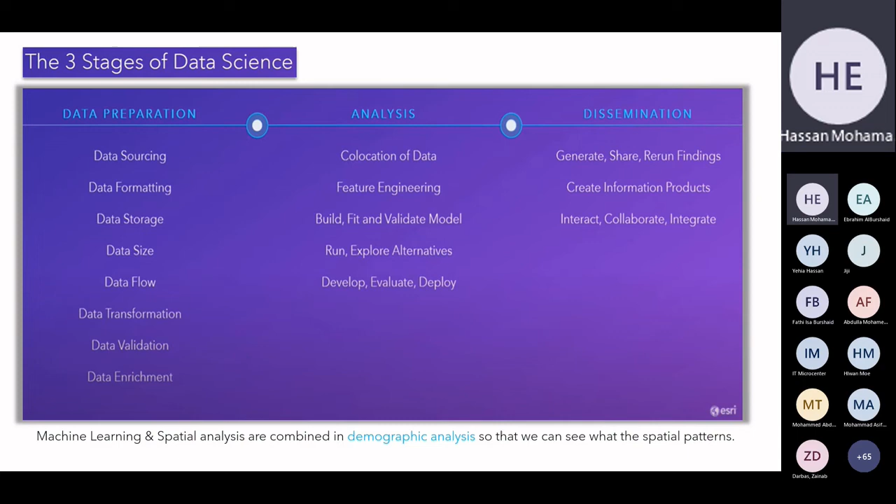ArcGIS notebooks are built on Jupyter notebooks, an open source web application that allows you to create and share documents with Python coding and visualization. For example, now we're talking about demographic statistical visualization - ArcGIS Python and ArcGIS notebooks play the major role for spatial data science. With ArcGIS notebooks, we can integrate with ArcGIS Pro, and we can perform the analysis and view the results in a geographic context to automate your workflow.

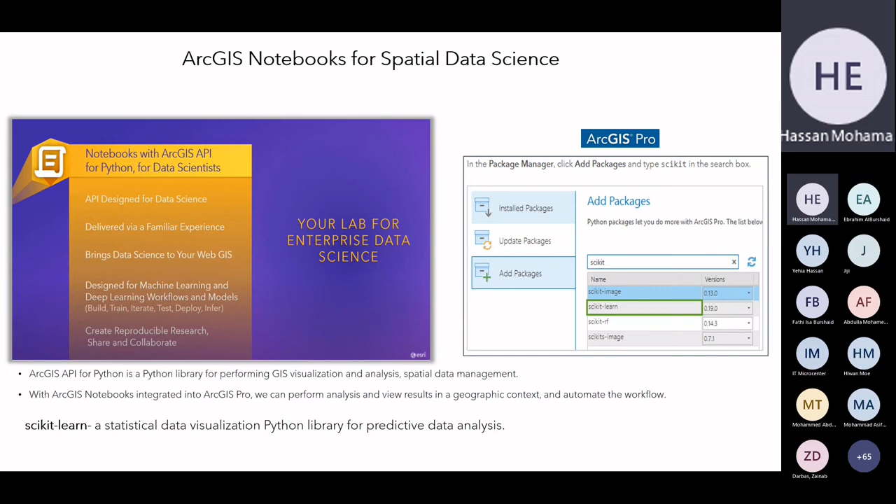So we will use the machine learning algorithm called K-means clustering to analyze the population. If you look at the screen here, we have mentioned scikit-learn - we'll talk more about this in my next slide. Scikit-learn is a statistical data visualization Python library for predictive data analytics.

Here we are talking about the population and demographic analysis using machine learning. Demographic analysis has been raised due to various reasons, such as rapid urbanization and extending longevity, which results in a higher demand for public services across the territory or across the country.

Demographics are the most important data points, the only metric that truly reflects the customer's age, gender, ethnicity, or income. So with this information, governments could take quick decisions and planning.

We can use Python or other languages to analyze the demographic data. The most popular computer languages to implement machine learning models are Python and R. Machine learning is based on algorithms that are able to improve their performance with each iteration.

The iteration process is very important. The optimization of algorithms allows machines to learn the process and make predictions faster than a human can. Here, K-means clustering is in the Python program, as I mentioned in my previous slide. It's a popular machine learning package from scikit-learn.

Scikit-learn is a statistical data visualization Python library for predictive analytics, which we can use exclusively for statistical analysis for demographic and population data. These slides are talking exclusively about statistical organizations and population demographics.

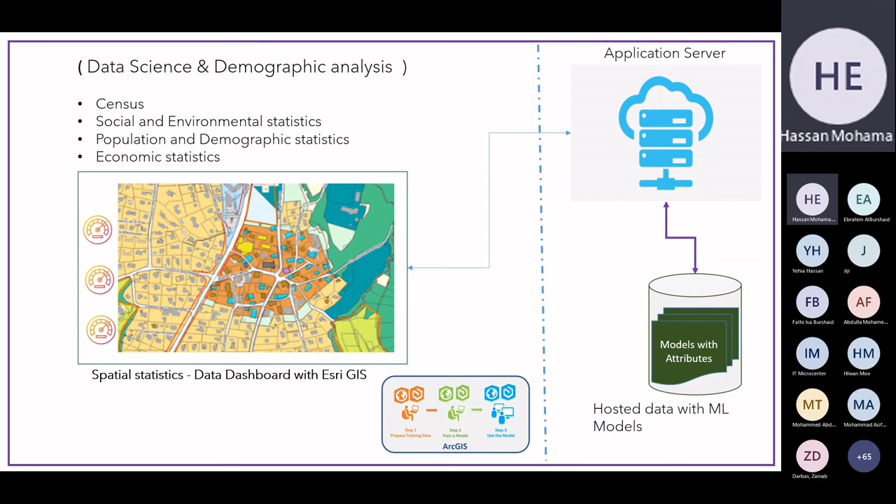We can deliver deep learning techniques. So now, what are the challenges for the statistical organizations?

As I explained, saving time and money, labor, and environmental impact, and speedy, timely information for decision makers using deep learning, spatial data analytics, and machine learning solutions. It also increases efficiency and expands capacity, improving accuracy, engagement with the user community, smaller budgets and revenues and staff, growing privacy concerns, and increasing demand for better resolution and higher quality for the long run.

For the long run, it is really very important for the stakeholders, expansion planning. This technological idea of technology improving - census is one area, but now this is more advanced, not just relying only on the census, going upon deep learning and techniques from the statistical organizations. It gives more value for the demand process.